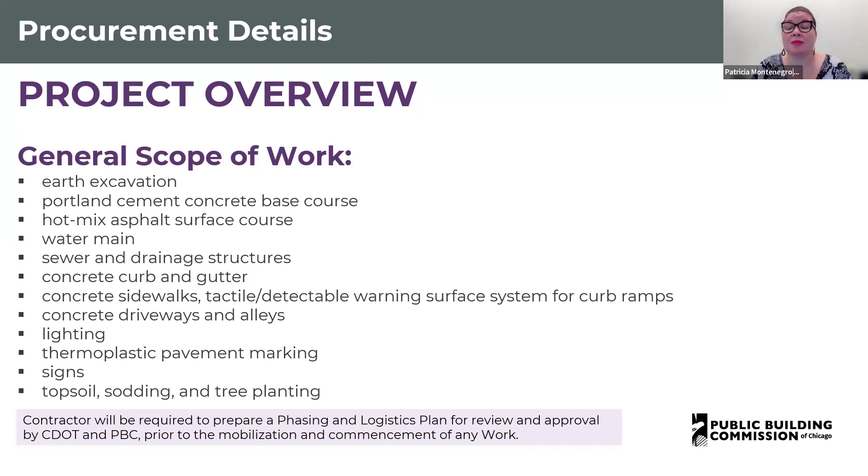The time for completion can be found in book 1. We are looking at a substantial completion date for no later than November 29th, 2024. We have 2 schedule milestones. Schedule milestone number 1, the date for that is no sooner than July 31st, 2024, and then concluding by August 31st, 2024.

Again, the substantial completion is by November 29th of 2024, and schedule milestone number 2 for the landscaping portion of the work shall begin no sooner than October 1st, 2024, and will conclude along with the substantial completion for the project. We've identified liquidated damages of $1,000 per day for the substantial completion date if missed, and $500 per day for these schedule milestones.

The availability of all of the contract documents, including book 1, book 2, book 3, and the construction drawings, can be found on Aloha Print Group's plan room. The link is provided on the screen and will be available on our website. You can find her contact information here as well. The documents are also available with our assist agencies, and there's the link provided. This list is also available on our website.

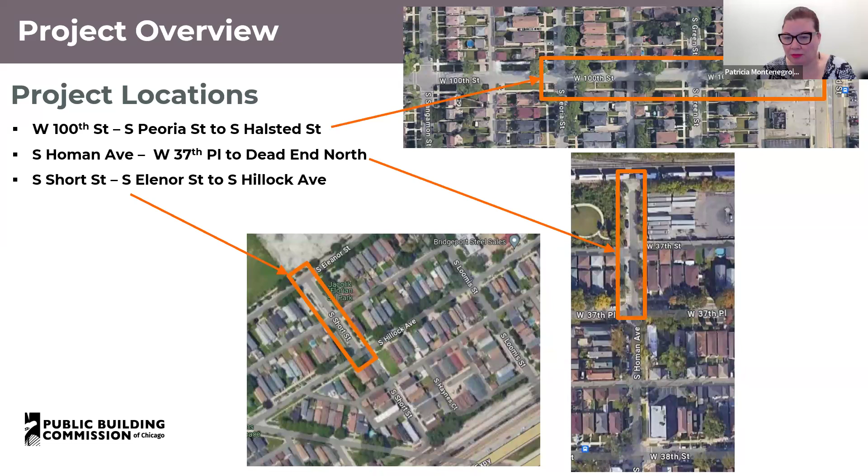And this concludes the procurement detail aspects of our meeting. At this moment, we're going to transfer over to the technical review portion, where we will discuss the technical aspects of the project. So at this time, I will turn it over to Michael. All right, thank you very much, Patty.

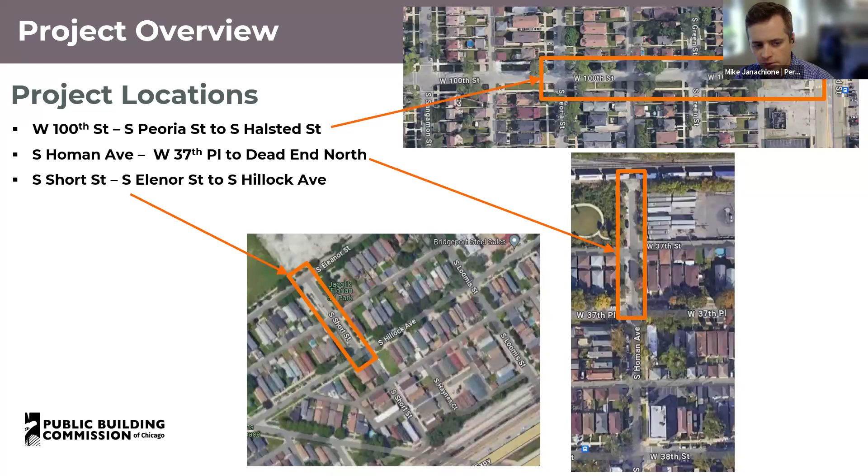You're welcome. As we've gone over, this package consists of 3 project locations, highlighted in the aerial images shown on this slide. The 3 locations are West 100th Street from South Peoria Street to South Halsted Street, South Homan Avenue from West 37th Place to roughly 300 feet north where it dead ends, and South Short Street from South Eleanor Street to South Hillock Avenue.

Finally, the roadway width for 100th varies from 24 feet to 31 feet.

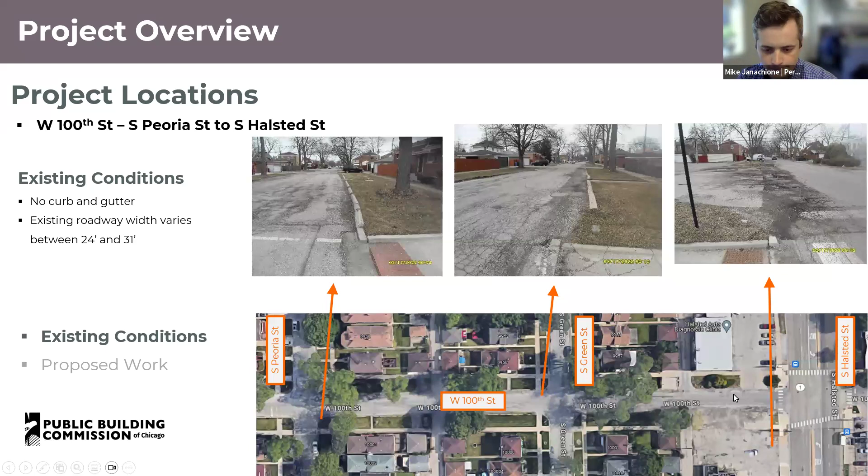100th is primarily residential. For this location, there are 2 commercial buildings on the northwest and southwest corners of 100th and Halsted.

The commercial building at the northwest corner is an auto shop, currently operating, with 2 entrances to that property, one on 100th and one on Halsted. The commercial business at the southwest corner is currently vacant and for sale, but that property also has 2 entrances,

one on 100th and one on Halsted. 100th Street has sidewalk on both the north and south side of the street, and there are 6 driveway aprons, the 2 commercial entrances that I mentioned, and 4 alley aprons along 100th.

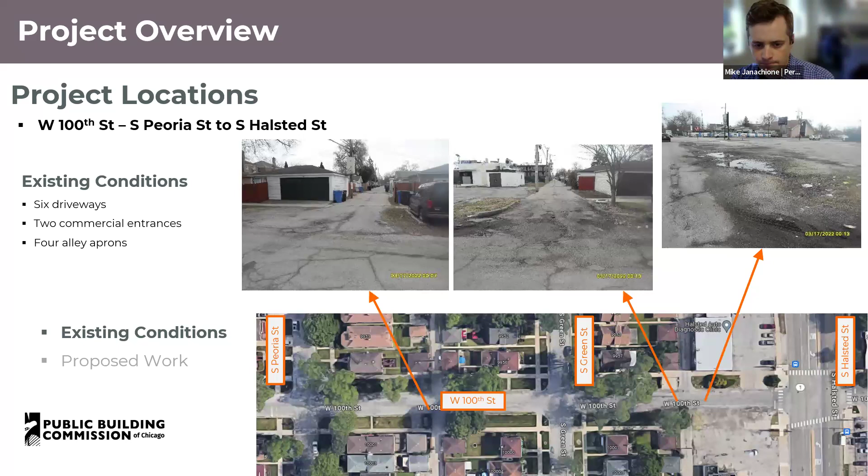There were two borings taken on 100th Street, and the entire environmental report can be found in Book 3, Appendix C, Part 3. The soil disposal classification for 100th came back as CCDD unrestricted, and this is represented in the schedule of prices as earth excavation to CCDD facility.

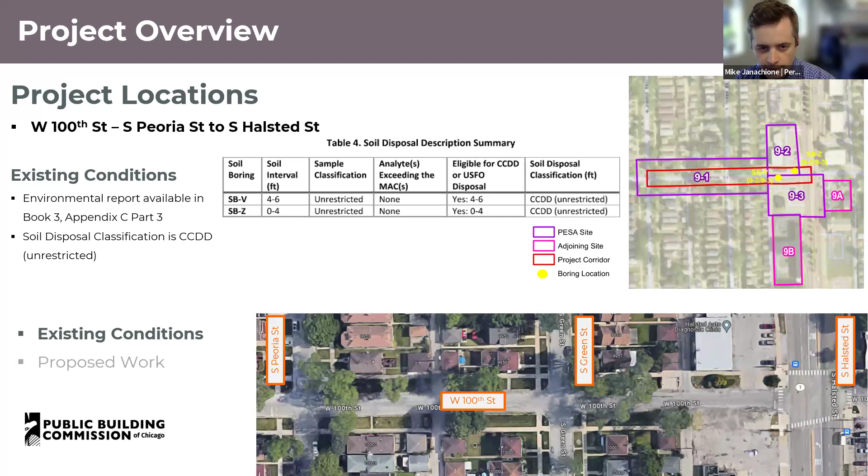For our proposed improvements on 100th Street, we have full depth pavement reconstruction, and we're proposing to widen the roadway to a consistent 31-foot section and install curb and gutter on both sides of the street.

There will be 8 catch basins installed along 100th Street, and to support these catch basins, there's 107 feet of 8-inch ESVCP and 40 feet of 8-inch ductile iron pipe that'll be installed as lateral connections to the existing 12-inch sewer in 100th. That existing 12-inch sewer is going to remain in place and is not proposed to be reconstructed. The 40 feet of DIP is required at Green Street.

The catch basins at the northwest and southwest corner require DIP due to horizontal clearances from the existing water main there.

In addition, there are 4 alley aprons and 6 driveway aprons that'll be reconstructed, in addition to the 2 commercial entrances on 100th Street. For those 2 commercial businesses, while those aprons are under construction, there will be access at the additional access points they have along Halsted Street.

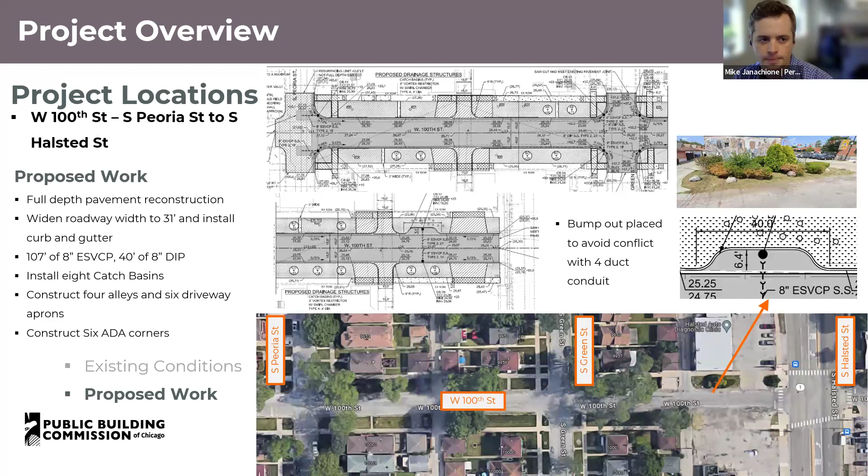So our second location is South Homan Avenue from West 37th Place to roughly 300 feet north to the dead end. Homan dead ends at a BNSF railroad line to the north.

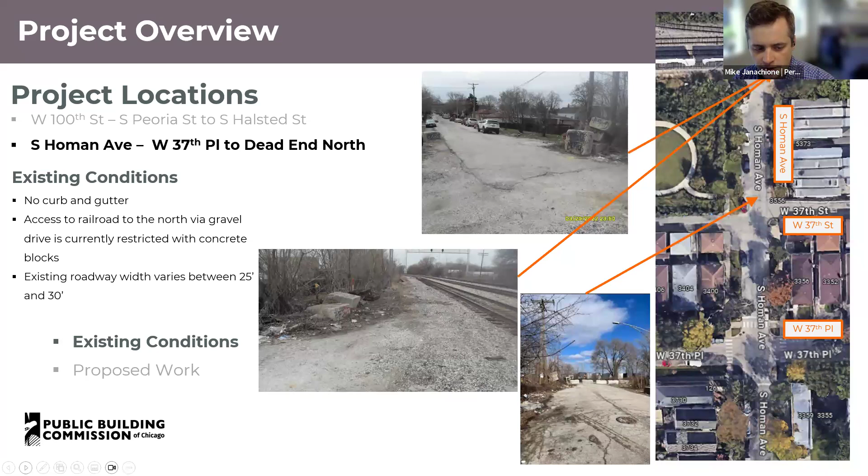Homan again has residential properties just north of 37th Place, going until the first alley north of 37th Place. North of that first alley, to the west of Homan, there is a park owned by the school a little bit further to the west. On the east side of Homan, there's a large parking lot, currently being used for truck trailer parking.

There's sidewalk on both sides of Homan. On the east side, it extends north from 37th Place to that first alley. On the west side, it extends a little bit further past the alley and ties into that park. There are 2 residential driveway aprons and 2 alley aprons, both currently back pitching in the existing condition.

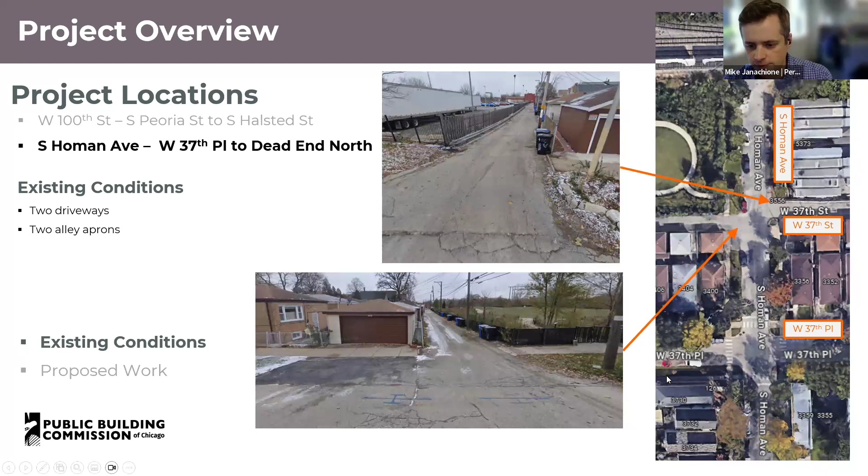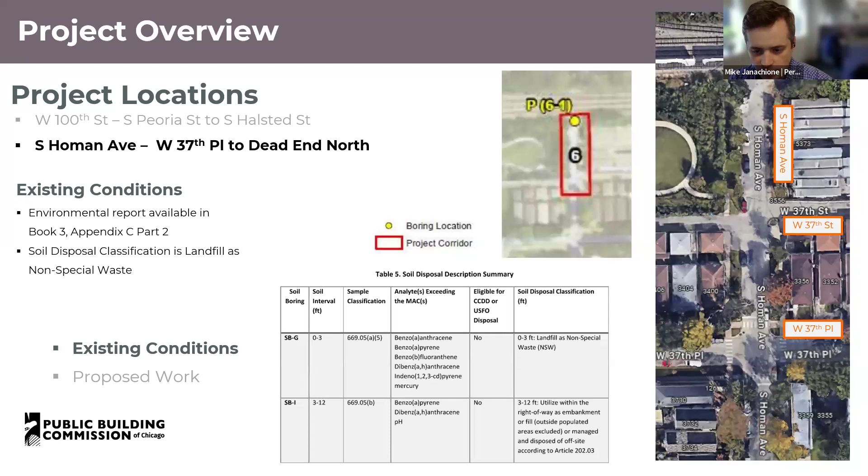On the environmental side for Homan, 1 boring was performed here. The full environmental report can be found in Book 3, Appendix C, Part 2. The soil disposal classification for this location came back as landfill, so that is represented in the schedule of prices as earth excavation and non-special waste disposal.

The proposed improvements along South Homan include full depth pavement reconstruction and widening the roadway to that consistent 31 feet throughout the corridor, and installing curb and gutter on both sides of Homan. In addition, at that dead end to the north, there is a proposed cul-de-sac that will have full height curb around it and will eliminate access to the roadway to the railroad to the north.

And because this location is within 50 feet of a railroad, the contractor will be required to get railroad liability insurance.

In addition to the pavement reconstruction, there are 2 catch basins and 2 ADA ramps at the northeast and northwest corners of 37th Place and Homan, which will be reconstructed. The lateral connections to the existing sewer for this are both going to have to be that 8-inch DIP due to horizontal and vertical clearances from existing water mains, so there's 35 feet of that.

Again, the existing sewer in Homan will not be replaced or reconstructed. The 2 alley aprons and 2 driveway aprons I discussed earlier will both be reconstructed as part of the work here.

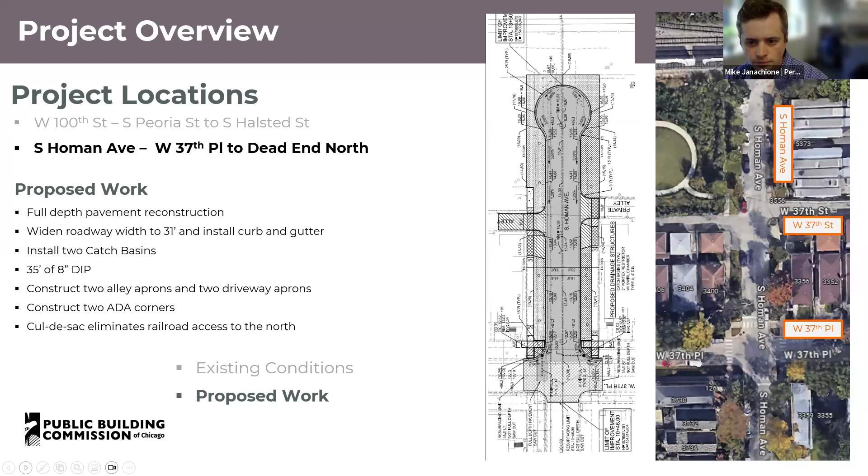In addition, there is an existing 12-inch water main that is to be abandoned along Homan. There are 2 fire hydrants on the west side of Homan. One is at the northwest corner of 37th Place and Homan, the other is further north, called out in the image as A. The first fire hydrant is to be maintained, and the water main is to be capped just north of it and abandoned, extending to the north. The fire hydrant marked as A, to the north, is going to be removed and not replaced.

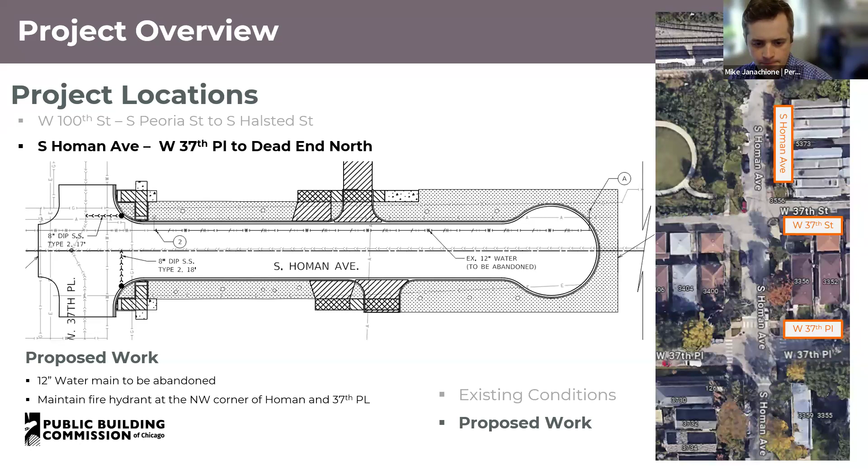Our final location here is South Short Street, from South Eleanor Street to South Hillock Avenue. Similar to the first two, pavement is in poor condition. There's no curb and gutter, and the existing roadway width varies between 27 feet and 34 feet. There are also 2 driveway aprons and 2 alley aprons at this location.

I've also shown some images here. There's a park just north of Short Street, owned and operated by the Chicago Park District. There are 2 entrances to that park, one on South Short Street and the other on South Eleanor Street. And the image on the bottom shows that on the south side of South Short Street, there's a kind of double wide existing sidewalk that extends pretty far into the parkway area.

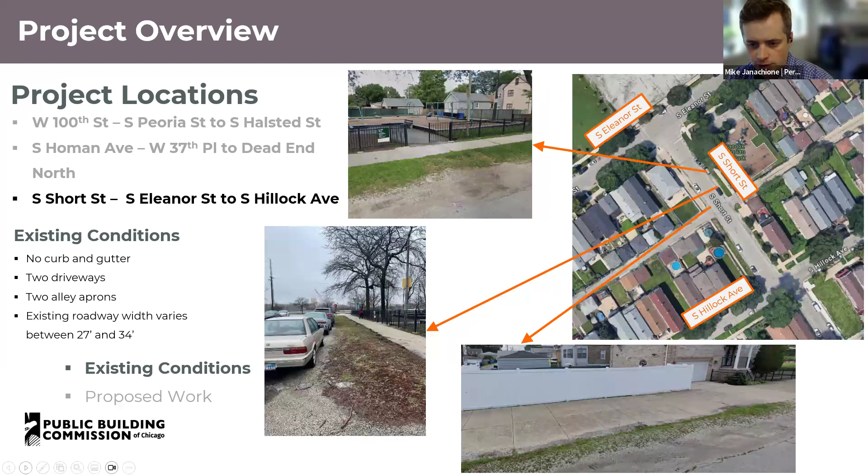On the environmental side for Short Street, there were 2 borings performed. The full environmental report is available in Book 3, Appendix C, Part 1. The soil disposal classification came back again as landfill, non-special waste, so that is represented in the schedule prices, similar to Homan, as earth excavation and non-special waste disposal. One thing to note is there was a former People's Gas and Light facility, which has since been abandoned. It's now just an empty lot to the north of this location.

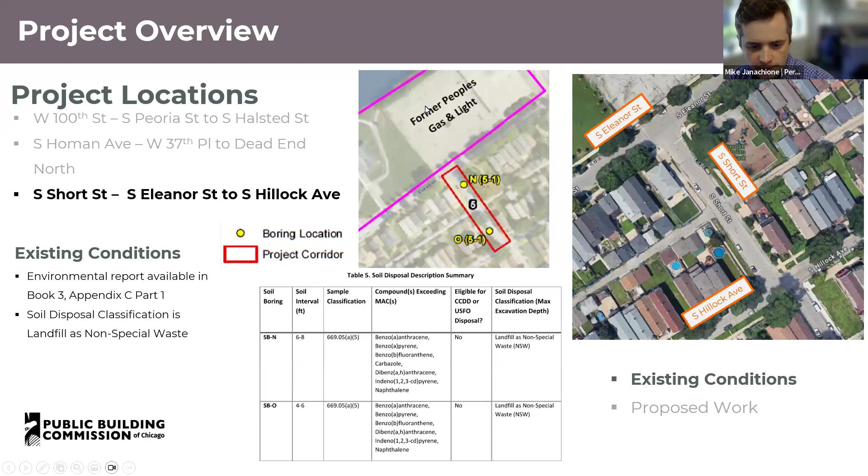The proposed improvements along Short: we have full depth pavement reconstruction, again widening the roadway to 34 feet here, and installing curb and gutter on both sides of the street. The 2 alley aprons and 2 driveway aprons are proposed to be reconstructed.

As I mentioned, the sidewalk at the park to the north of Short is proposed to be reconstructed. While that's being reconstructed, there should be access to the park along South Eleanor Street, so there are two access points, one will not be impacted by our work. We are also removing or narrowing down that sidewalk from the widened existing condition down to the standard 6-foot sidewalk width, in addition to adding landscaping and trees in the parkway there.

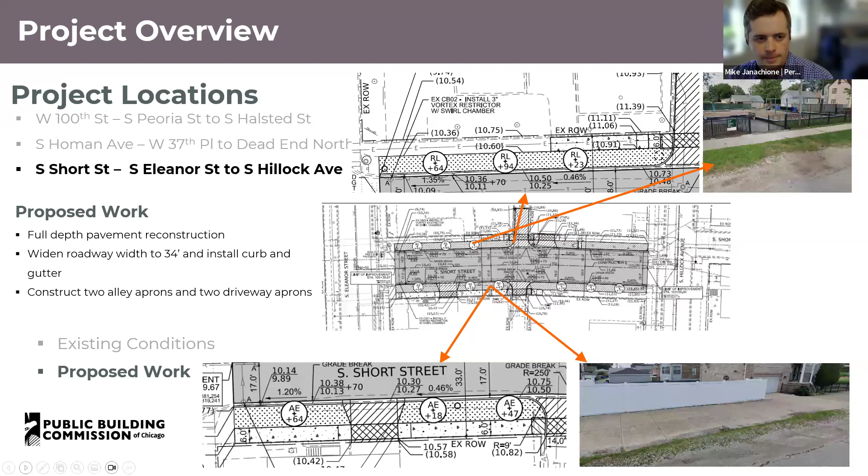That segues into our landscaping. All 3 of these locations will have proposed landscaping elements. The Bureau of Forestry went out and did a pretty comprehensive survey of all these sites, and they proposed locations for removal of existing trees, protection of existing trees, and root pruning limits. We show the removal and protection of existing trees in our existing condition plan as part of the contract documents, and the new trees to be planted and new grass is shown in our proposed plans.

All 3 of the locations have proposed sodding to be placed in the parkways. Only 2 of the locations, however, have proposed trees to be planted in the parkways: 100th Street, which has 13 trees in total between the north and south parkways, and Short Street, which has 9 trees in total on either side.

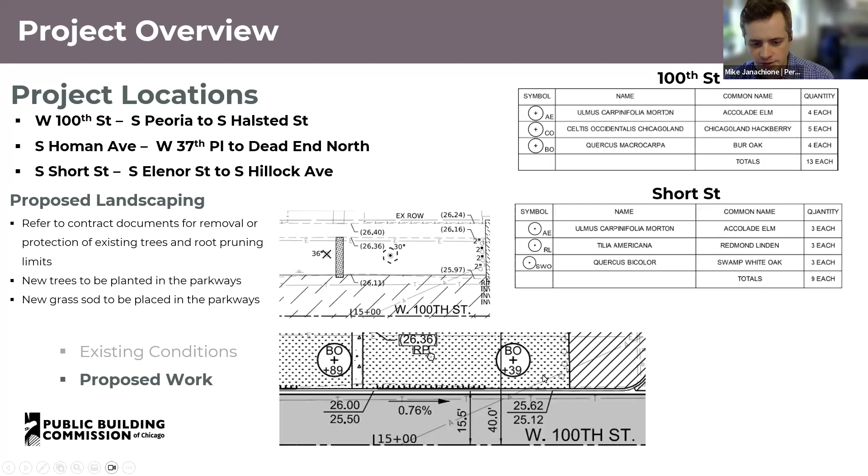Finally, here we have our proposed lighting improvements. All 3 locations will have proposed lighting improvements, which include new streetlights and their foundations. The new proposed streetlights will have piggyback lighting on the back of the poles to provide lighting for pedestrians on the sidewalk, as well as the standard luminaire providing lighting for the roadway. All those luminaires will be updated to the new LED lights as required by TEO.

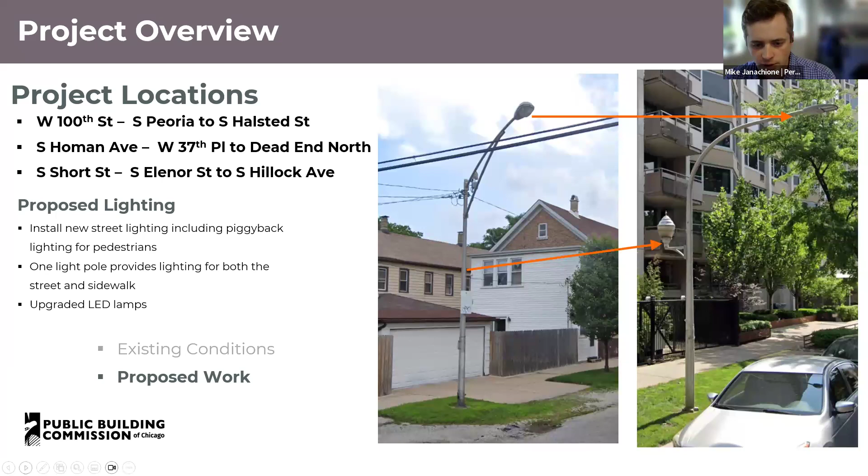I noticed that we had someone join us. If you could please introduce yourself, company name, your name and company name, please. On the iPhone. Okay. Well James, did they put their name in the chat or anything? No name in the chat. I was also checking for any questions in the chat, but it looks like you and Mike did a great job today. No questions right now.